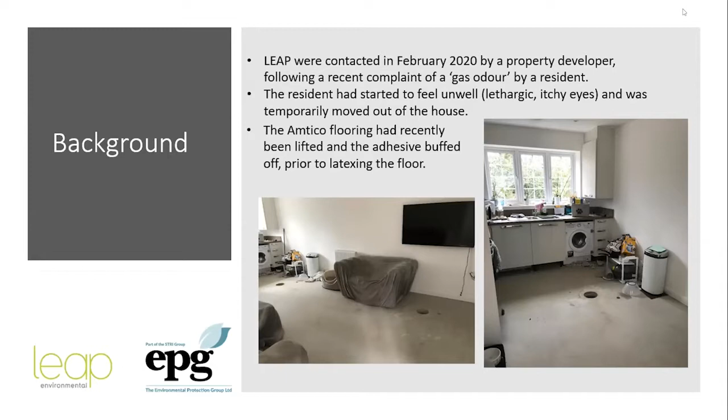So at this stage, nothing obvious to identify why she might be having these symptoms.

Following the background research, we quickly mobilised the site and carried out some ambient monitoring for bulk gases and VOCs in the ground floor rooms, as well as where there were incoming services and penetrations through the slab, so under her kitchen sink, and through the subfloor space via the air bricks. As part of a previous service inspection on the property, when they were trying to rule out a gas leak, there had been a hole drilled in her kitchen floor as well, so we monitored through that too.

The monitoring recorded low concentrations of bulk gases, up to about 0.1% methane and carbon dioxide, so nothing significant there. Generally, VOCs were recorded up to about 0.5 parts per million, with the exception of that hole in the kitchen floor, where we recorded 13 parts per million. So this wasn't necessarily significantly high, but it was the only location of anything to note.

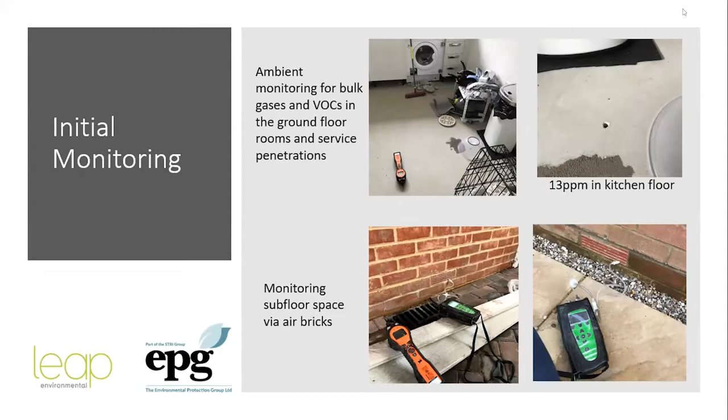So the next stage of the investigation was to go and collect some vapor samples. We did this using SUMA canisters. We also installed a vapor pin in her kitchen floor. This was given that the odour had started once the floor had been lifted, and this is where we'd found 13 ppm. This kind of led us down the route towards looking at her flooring.

And we also collected control samples from an adjacent property, and also ambient air outside the property as well. This was a mix of kind of snapshot, collecting a sample over 5 minutes, as well as slow release canisters over 2 to 24-hour periods, to see if there was any variability of when the vapours were occurring.

Samples were tested for VOCs and TICs, those are tentatively identified compounds, with concentrations generally inconclusive. We did record pentane and isopentane in the air and some subfloor samples, but nothing at that stage to indicate a source of her health problems.

So our next step was to actually core through the ground floor slab and look at the soils underlying the property, to kind of see if it was a potential source, or at least to rule it out at that point.

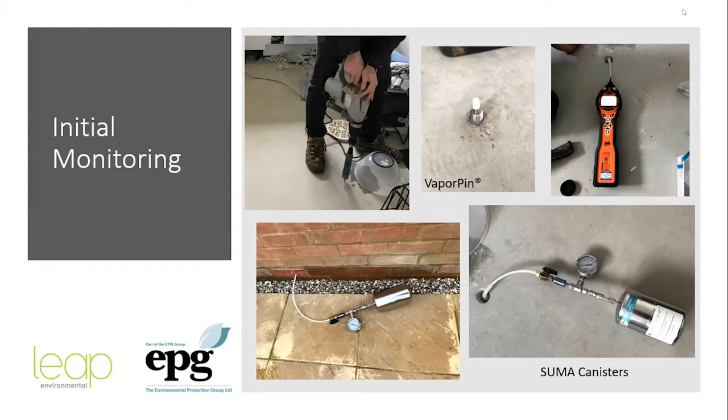So we cored through the ground floor and conducted hand augers beneath the property, with testing completed both on the soils beneath the site and the ground floor slab, and like the makeup of the ground floor. We also did headspace testing with the PID on the soils beneath the house.

So from the core, the floor material was made up of a thin layer of screed, 90 millimeters of concrete, and up to 380 millimeters of polystyrene insulation. So we separated out each of these layers, testing them for the VOCs and TICs.

Whilst the concrete and the screed did not record any measurable concentrations of VOCs, we did record a tentatively identified compound called 2-ethyl hexanol, and that was both in the concrete and the screed layer. Testing on the soils and the headspace testing ruled out the soils as a source with nothing significant recorded there. So we knew it wasn't coming from something underlying the property at that point.

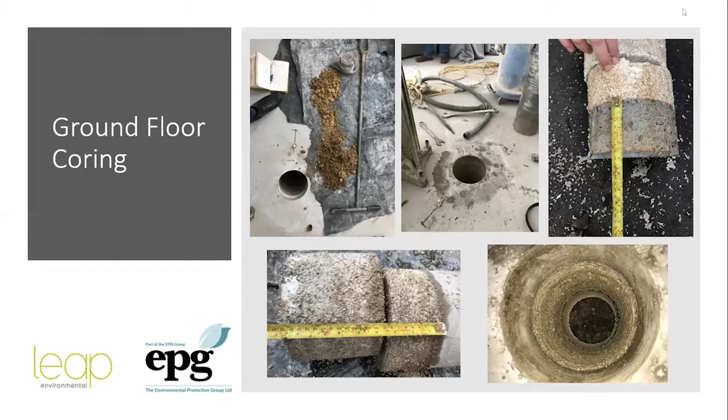And it was at this stage that we got into contact with EPG and with John Andrews, and they carried out research into this project. They undertook research into the construction products used in the house, and looking into any potential VOC release, and reviewed all data that we had collected to date.

So compounds pentane and isopentane and 2-ethyl hexanol had been identified in elevated concentrations within the screed and concrete floor in the kitchen, and isopentane had also been recorded in indoor air samples. EPG carried out research into these compounds. They had quite an extensive amount of information that they went through.

And it looked as though 2-ethyl hexanol, called 2EH for short, looked like the most likely source from their research. So 2-ethyl hexanol could be released from vinyl flooring under certain very specific conditions.

So alkaline hydrolysis of adhesives which contained phthalate plasticizers by alkali oxides, which can be found within concrete. This indicated possibly that the flooring had been placed when the concrete was not sufficiently dry, which created conditions that could release 2-ethyl hexanol.

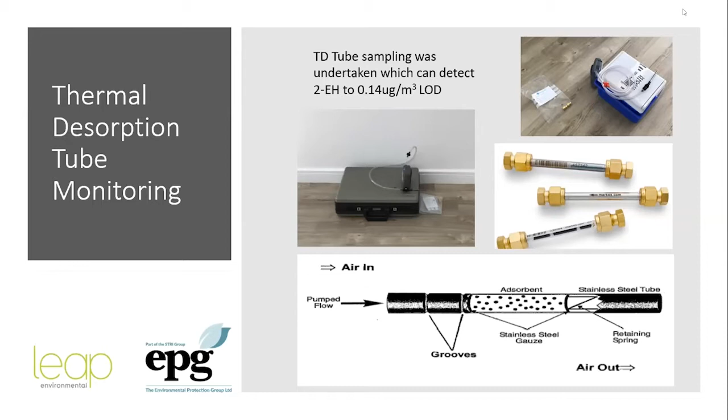Following this, it looked very likely that this was the cause of the health complaint, and EPG came up with some remedial works that should be undertaken on the property. This involved removing all of the original PVC flooring and the screed that had been placed on this concrete, and making sure all service entries were sealed with a suitable sealant.

The concrete was then heated to reduce the relative humidity to less than 75%. This was to prevent further reaction occurring, because it was likely that the damp concrete in the first place was the reason for the reaction to occur. The floor was then sealed with an epoxy resin, a low alkaline screed was placed, and the Amtico flooring was reinstated with a dry bonded adhesive.

These measures were used to prevent any further reactions occurring, and actually to stop more 2-ethylhexanol being generated. In addition, the Amtico flooring would also act as a seal, removing the pathway of the 2-ethylhexanol that could still be within the concrete. The property was then ventilated, and LEAP returned to do some verification monitoring.

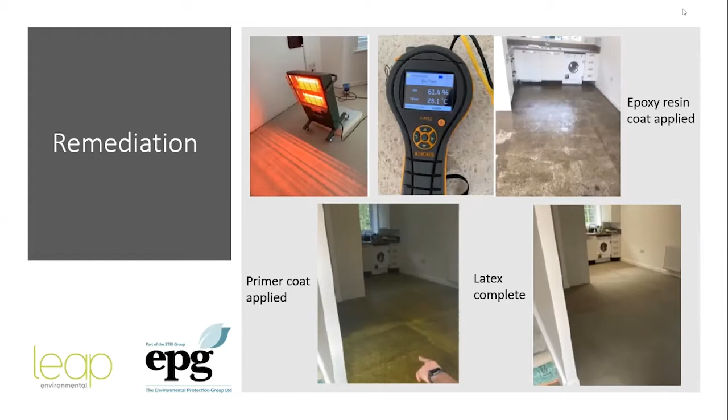The monitoring was undertaken. Initially, we still recorded elevated concentrations of 2-ethylhexanol. These were thought to still be residual vapors from the recent remedial works. The property obviously wasn't being lived in at this stage, so natural ventilation, people opening doors and windows regularly, wasn't occurring.

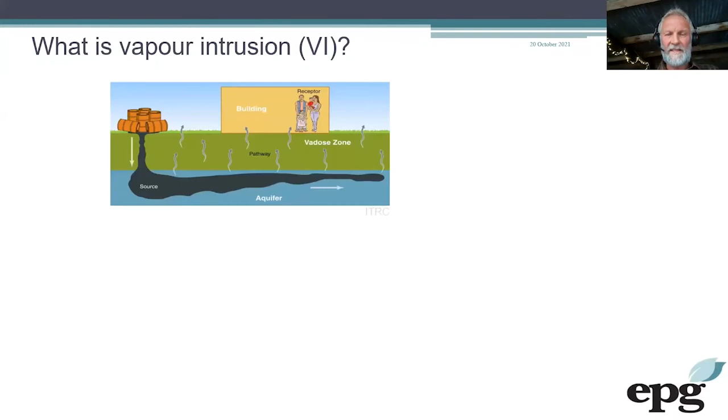And so what is vapor intrusion? Actually, I'm just going to remove my thumbnail. There you go. So what is vapor intrusion? In its basic form, looking at this conceptual model, it's the movement of VOCs from the subsurface into indoor environments where people living there are exposed through inhalation exposure.

And it's a typical source-pathway-receptor type of relationship, and it's relevant both to planning or future risk, or to the Part 2A or current risk scenarios.

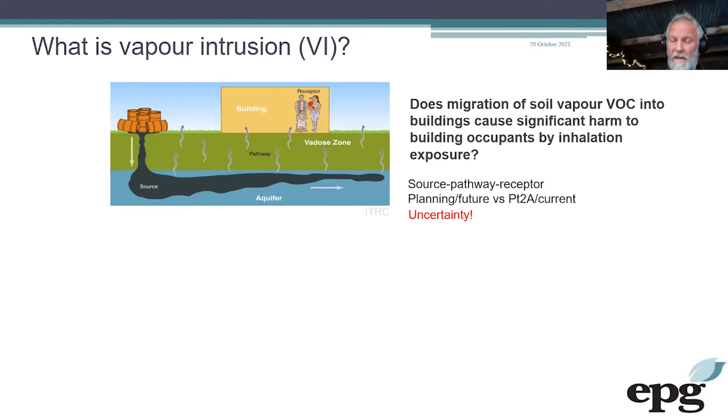Under Part 2A, there might be a potential impact on indoor air quality, where you're looking at all of the source-pathway-receptor, including possibly looking into the building, whereas under planning you might be considering a future building, with additional uncertainties as to how anything you build later, such as a building on land, might affect your understanding of the vapor intrusion conceptual model. So through all parts of that, there are potentially large amounts of uncertainty.

The VOCs we're talking about are always a combination of being volatile and toxic. We're familiar with petroleum hydrocarbons such as BTEX compounds and chlorinated hydrocarbons such as trichloroethylene and vinyl chloride.

In terms of SVOCs, naphthalene, the most volatile of the PAHs, definitely has the potential to pose vapor intrusion risks under the correct scenario, whereas lower volatility but more highly toxic PAHs such as benzopyrene don't pose vapor intrusion risks, but they can pose additional risks, typically through dust inhalation exposure.

Methane is a highly volatile hydrocarbon. It's gaseous in its normal state, relatively low toxicity, but as we know, can cause acute risk at high concentration. Really, methane is no different from any of those other compounds - it's just an organic compound with a toxicity, a volatility, and various types of source.

They're not so different to radon either, although it's not an organic compound. Radon is a gas, it's toxic, it gets into buildings, and it's not so different to petroleum hydrocarbons. Radon has a half-life, which reduces its concentration as it migrates through the subsurface and into buildings. Petroleum hydrocarbons are the same - they biodegrade in the subsurface as they migrate into buildings. Yet as practitioners, we tend to separate all these things out, whereas they're all the same. They're just compounds that migrate under fluid flow situations into buildings, and it's a bit of an artificial divide we have between these things.

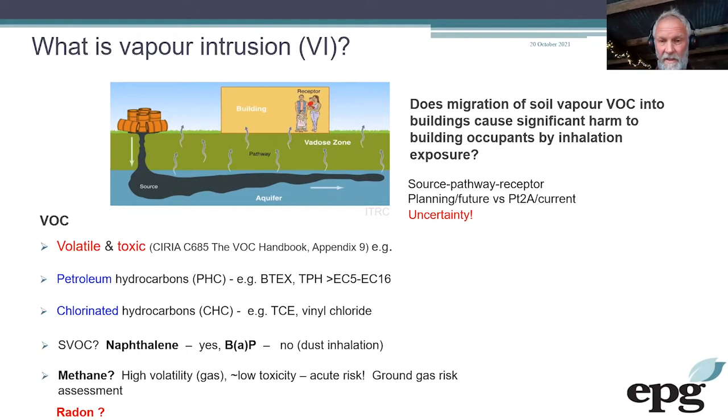There are significant health, social, financial, and reputational implications of making incorrect decisions with regards to vapor intrusion risk assessment. Many VI decisions are based on either false positive or false negative interpretations of data, resulting in either unnecessary indoor air quality testing or remediation. This is, as we'll see, particularly common for petroleum hydrocarbons.

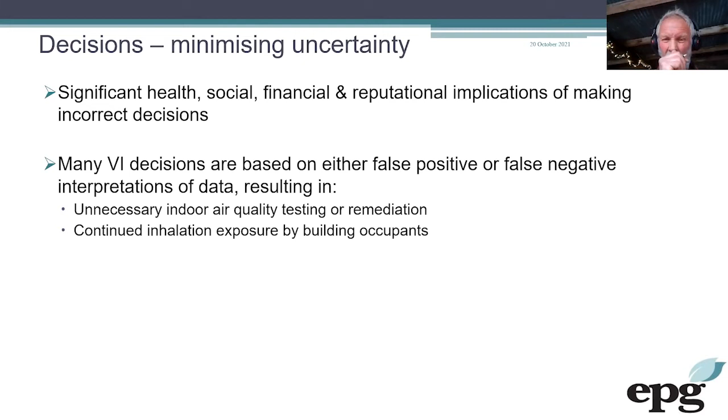Or your investigation may indicate a false negative conclusion, with building occupants thereby having continued inhalation exposure to these chemicals, and that's fairly common with chlorinated compounds - we'll see why there's a difference there between the two. But clearly, minimizing uncertainty is good for decision making, and it needs to be concentrated where it has the biggest effect for the less money and the less intrusion to people. Really key to minimizing uncertainty is development of a robust vapor intrusion conceptual site model.

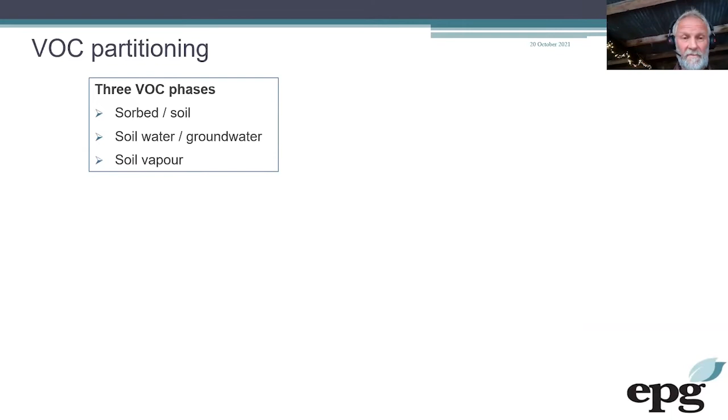Back to basics: VOC partitioning, and this is key to some of the uncertainty. There are three typical VOC phases: sorbed, soil pore water, or in the soil vapor or gas phase within the pore space. Under certain conditions, when these situations are saturated or exceed saturation in any of those phases, it gives rise to a non-aqueous phase, either light NAPL, such as petroleum hydrocarbons, or dense NAPL, such as chlorinated hydrocarbons.

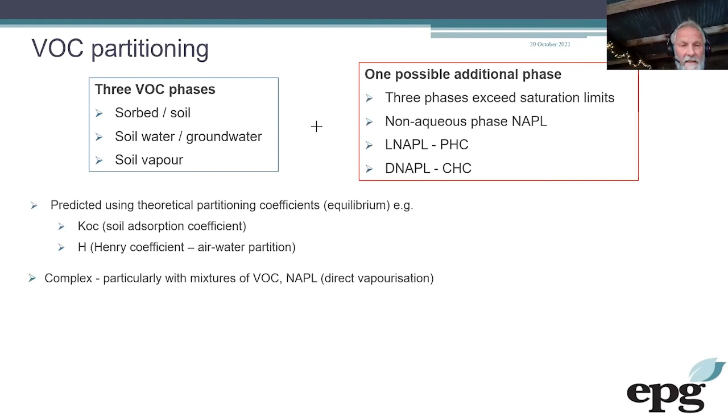The different partitioning between these phases is predicted using theoretical partition coefficients, which by definition are based on equilibrium situations, such as KOC, the soil adsorption coefficient, or the Henry's coefficient, which is the air-water partition. The thing to understand is that VOC partitioning is a highly complex mobile situation, particularly where you have mixtures of different compounds.

You might have NAPL, whereby you get direct vaporization from the NAPL into the unsaturated zone. So it's quite a complex situation. The important thing for us to remember is that when you predict a soil vapor concentration based on soil or groundwater, generally what you predict is far less than what you measure.

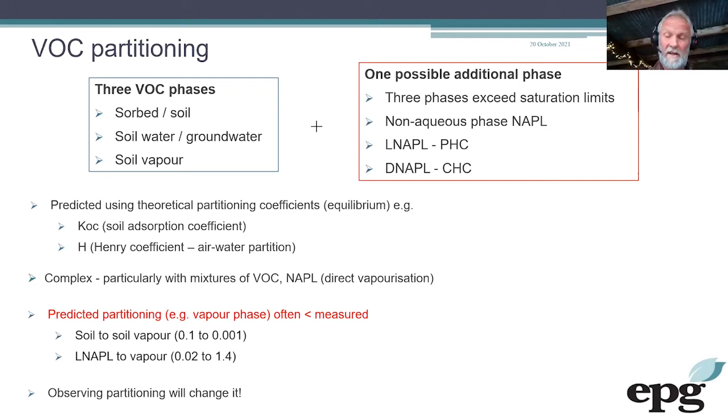So soil to soil vapor, that would be 0.1 to 0.001 times under or overestimation. With LNAPL, you might either underestimate it by 50 times or overestimate it by 1.4 times. Key to this, and this is also really evident when we look at methane within boreholes, is that the actual process of observing partitioning will often change it. We drill boreholes into the ground, we introduce oxygen, etc., and then we measure, and we need to understand how we can actually affect that process.

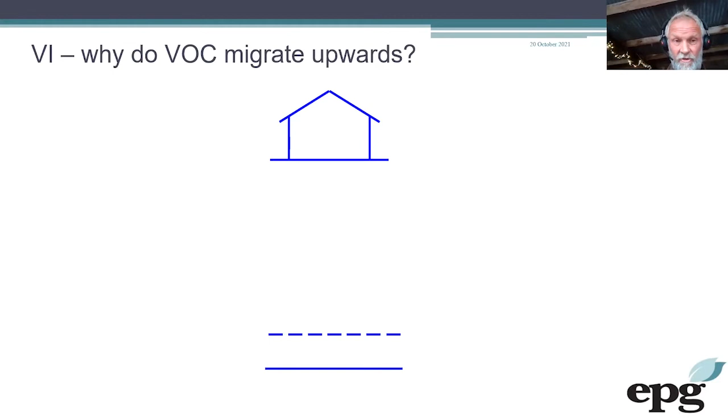So why do VOCs migrate upwards from the soil up into buildings, which is what we're interested in with regards to vapor intrusion? Really, it's got to do with gradients and flux.

Just as your cold beer warms up on a hot day and water flows downhill, things move in the subsurface down gradients. It's important to understand the idea of flux, which is concentration flow over time, rather than just looking at individual concentrations.

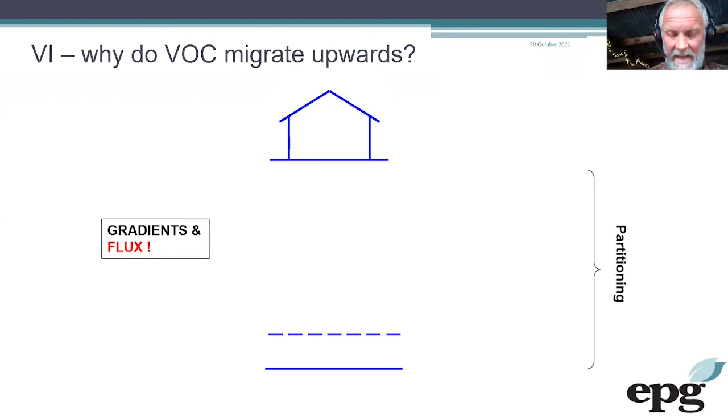In vapour intrusion risk assessment, it's the flux that really makes a difference, just as with ground gas, unless you're dealing with a landfill, the flux under diffusive flow is really slow, and the movement is down a concentration gradient. You can have diffusion from groundwater through the semi-unsaturated zone into the unsaturated zone, and as we'll see shortly, this is actually a really slow process, diffusion from water into the air phase.

Once it's in the unsaturated zone, it can migrate in any direction down a concentration gradient. It's only really when you get to about a meter or so beneath the building that you start to get increased flux under advective flow. And advective flow is flow down a pressure gradient. In order to have a flow through a building, you need to have a slab with holes in it.

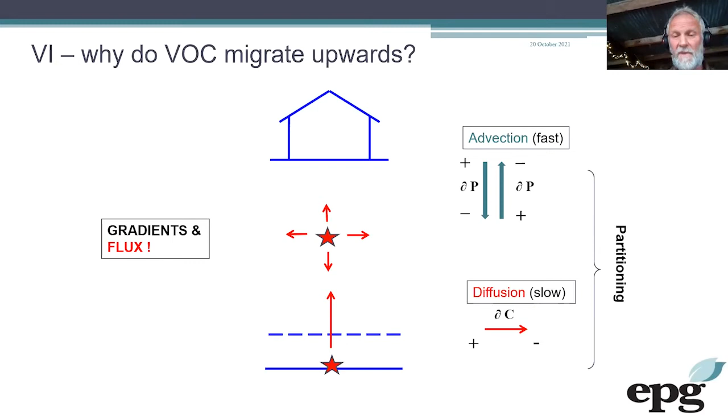Without holes, if you had a membrane that was fully sealed, you might have a pressure gradient between the two, but you would have no advective flow. You still have diffusion through a membrane, although it's a much slower process than through advection. The sort of pressures we're looking at are 5 pascals difference. So if you have a lower indoor pressure relative to the subsurface of 5 or so pascals, that's sufficient to drive the advection of soil vapor into the property.

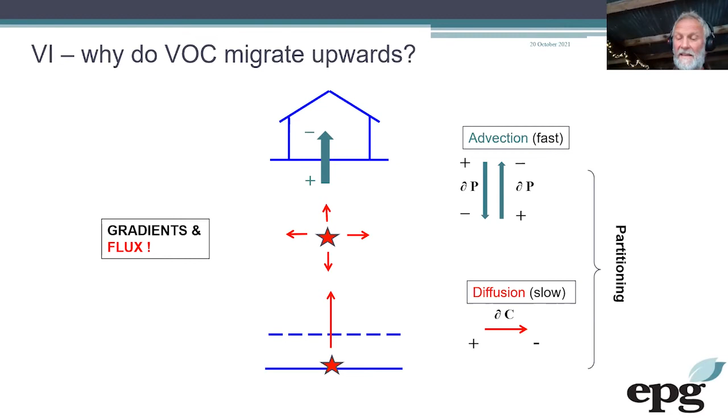Negative indoor air pressures are caused by a number of processes, one of which is the stack effect, which is a delta temperature, delta pressure effect, where warm air moves out of openings such as chimneys. It can also be caused by wind, so higher pressure on the windward versus the leeward side causes a change in pressure within the building.

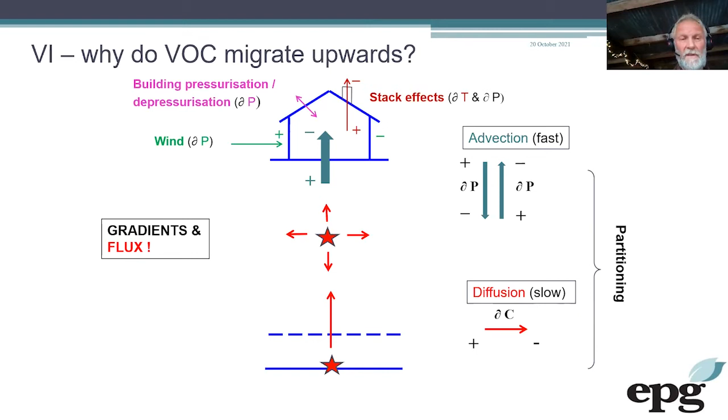It can also be caused by building depressurization, particularly in modern buildings where you have mechanical ventilation. If that's set wrongly and you get a net negative pressure relative to the subsurface, then you can draw contaminants from the subsurface into your property.

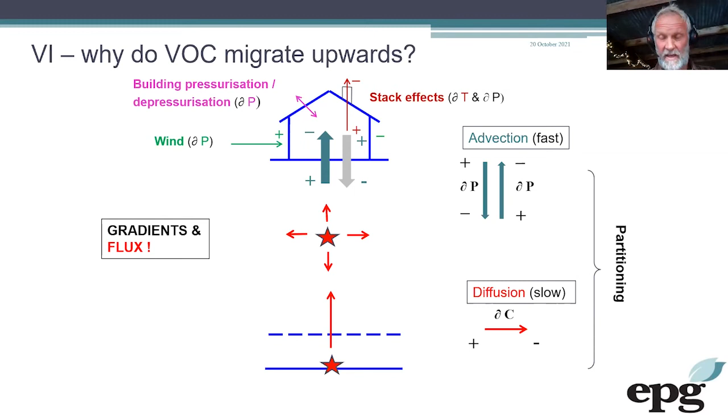Conversely, if you pressurize your building, you effectively turn off vapor intrusion, pushing air from the building into the subsurface. This can complicate investigation, because if you have an indoor source of VOC, you can actually push those into the subsurface where you can measure them, and you might come up with potentially incorrect conclusions about vapor intrusion.

Conventional CSM, and I'll go through this really quickly. We tend to look at VOCs either in groundwater or in soil, and we may measure or predict concentrations in the soil vapor phase. These diffuse and then advect through the floor where they dilute in indoor air.

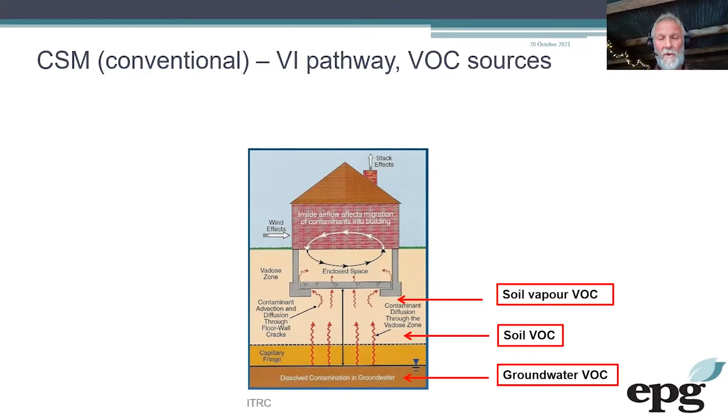This dilution through building ventilation is a key mitigating factor. The flux of contaminants out of the building due to ventilation is generally much higher than the flux through the floor. Where you have preferential openings in the floor, the balance of that flux gets affected, and you can significantly affect indoor air quality.

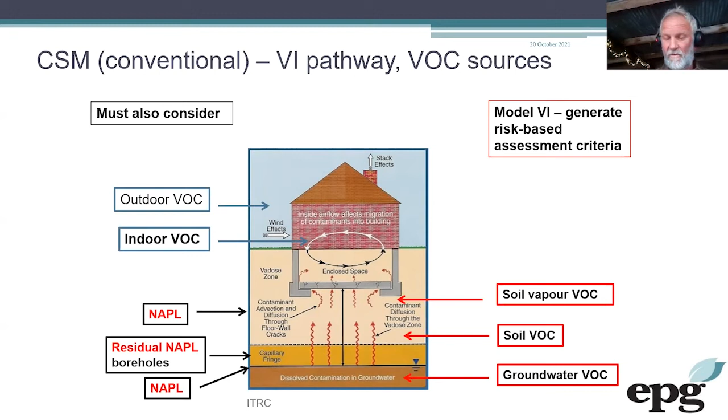We also have the additional complications of considering outdoor sources of VOC, and in particular indoor sources of VOC. A lot of the things we look for in the subsurface are also quite ubiquitous in indoor air.

Now, this is undertaken unless there's a potential acute or short-term risk, and this is actually really important. So if you have a site, such as one I'm working on at the moment, with a chlorinated solvent potential risk to residential properties, and if you think that there is a potential acute or short-term risk, then you should be open to the idea of actually looking into those properties either initially or very quickly as part of your multiple lines of evidence approach.

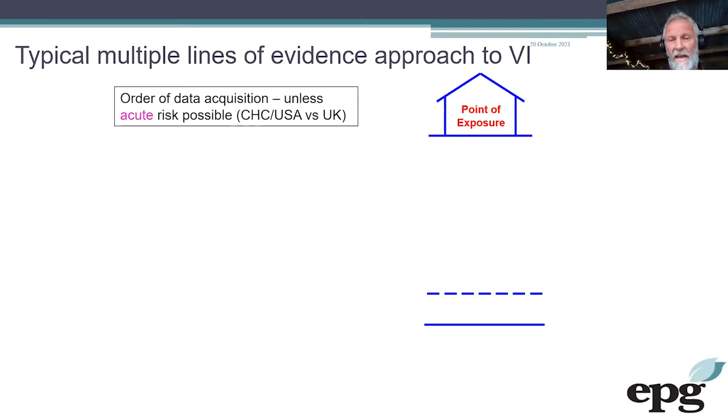This is something that is particularly undertaken in the US, where they have far more litigation. If you have a chlorinated solvent site, it's very difficult to show that there isn't a risk without actually going into that property and proving that's the case.

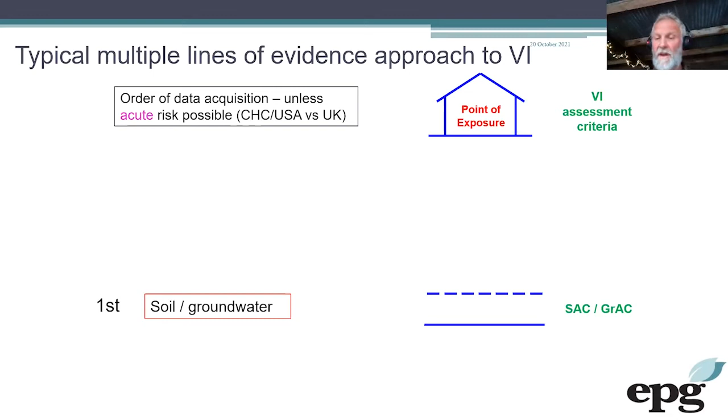So it's to rule out the likelihood of false negative assessment. We typically look in soil and groundwater, and we compare that with soil assessment criteria or groundwater assessment criteria that we may calculate or that's published.

Then in order to reduce conservatism, if those results are saying you've got a potential vapor intrusion risk, and we know there is a high level of over-prediction when you predict what might be in the soil vapor phase, you actually go and measure the soil vapor phase to take out that uncertainty, measuring what's further along the vapor intrusion route.

You may compare those with vapor GAC that you may calculate, or if you wait for SoBRA to calculate them for you. Thirdly, you might look at subslabs. You're getting closer to the point of exposure, and you want to know what's directly beneath the house, either by taking near slab samples just outside the house, or you may decide to drill through the floor and look in the subsurface.

When you take all of these things into account, you may actually go, okay, the evidence points to a potential significant risk, and then you actually go into the indoor environment and measure air quality and compare that with health criteria values.

You need to be really careful about your data quality objectives. You need to make sure that the laboratory detection limits, particularly for highly toxic compounds, are sufficiently low enough for you to be able to compare directly with health criteria values.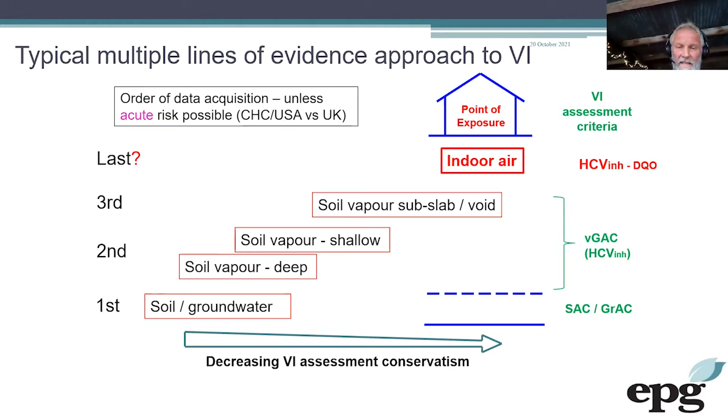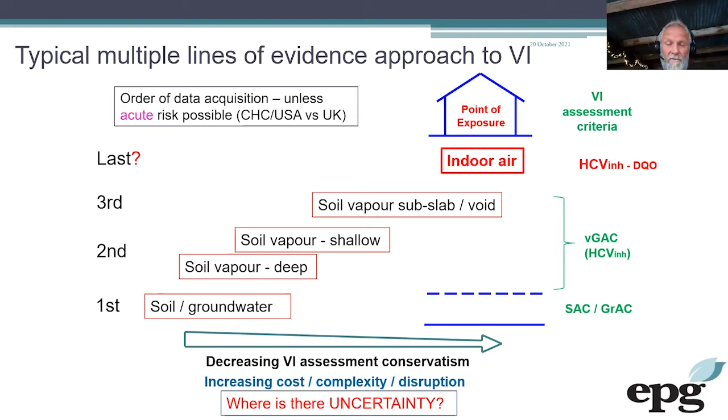So throughout this process, we're decreasing vapor intrusion assessment conservatism, but this obviously comes with increasing cost, complexity, and indeed disruption. So where is there uncertainty in all of those, as we'll see in a little bit.

We've looked at a conventional vapor intrusion pathway: diffusion through the deeper soil from groundwater or from soil, then advection and diffusion through the floor slab, dilution in indoor air, and then inhalation exposure. That's what models, the Johnson-Ettinger model, would be based on - that type of scenario.

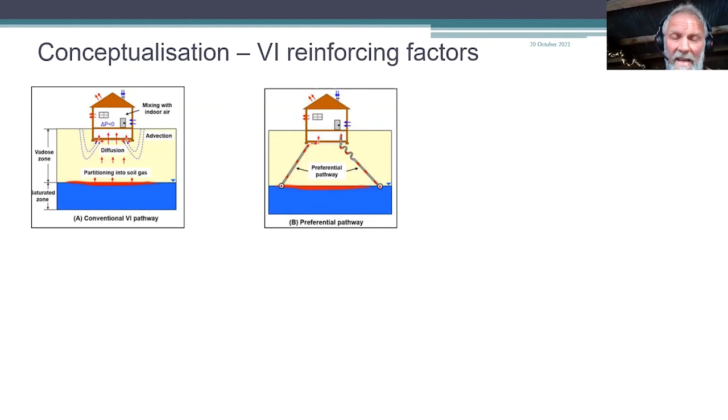But what models don't include are unconventional pathways, so preferential pathways. These may be deep sewers, so migrating through the sewer pipe or through the sewer annulus, or through any unsealed service entry going through the floor slab, increasing the advective flow.

Fractured bedrock is also, whilst it may not provide an entry into the building, it can provide preferential flow from deeper sources right to the underside of a building.

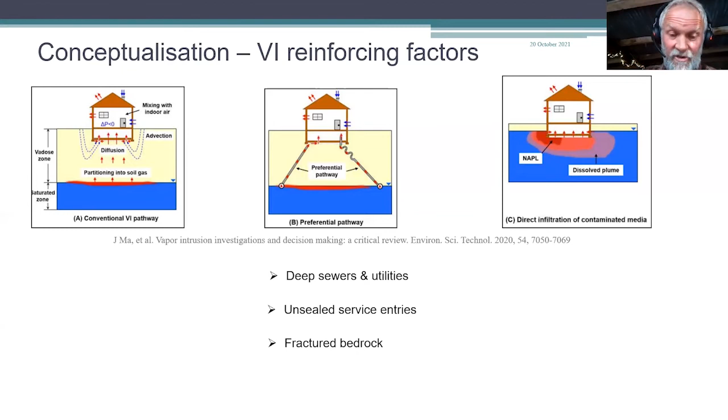Really importantly, direct contact of in particular LNAPL with building fabric - so you can have really significant vapor intrusion risks. It's slightly different to vapor intrusion; it's saturation of building fabric and entry into a building through classical vapor intrusion methods or processes, but you can end up with heating oil causing huge indoor air quality issues.

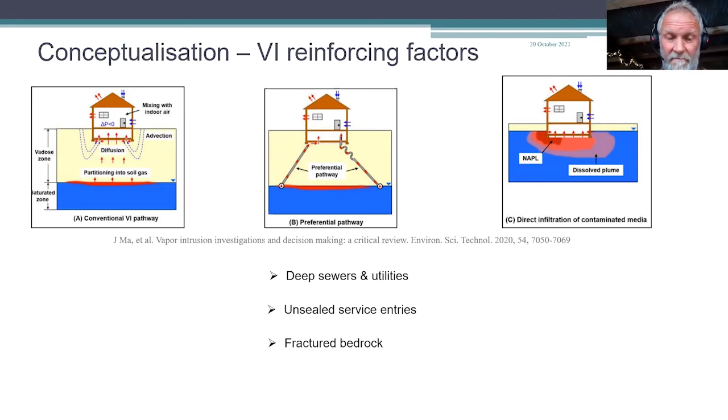I've been involved with a few cases where buildings are considered for demolition, and people having their health tested and being taken out of their houses.

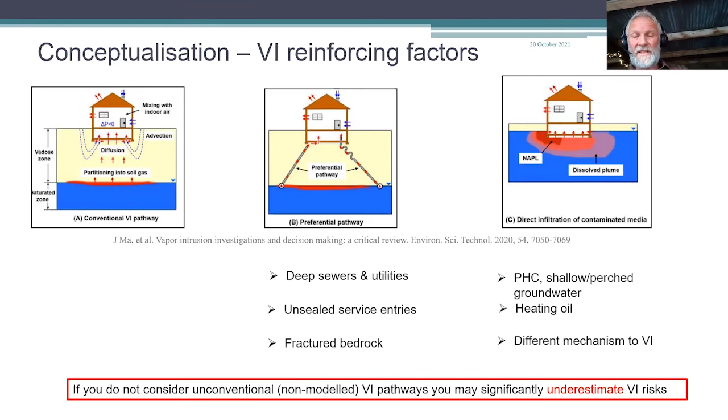So if you do not consider unconventional vapor intrusion pathways, then you can significantly underestimate vapor intrusion risk.

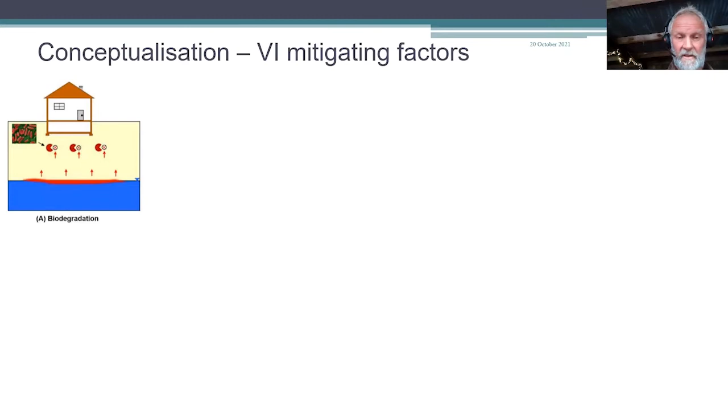But it's not all bad news, so there are a number of mitigating factors. First of all, biodegradation. If you have petroleum hydrocarbons, these can biodegrade very rapidly in the subsurface, and this process is responsible for reducing the vapor intrusion risk from petroleum hydrocarbons to quite low levels, except under certain circumstances, which we'll look into a little further.

Biodegradation is also the primary reason for different approaches to petroleum hydrocarbons and chlorinated solvents. In the US in particular, there's a real divergence in approach to looking at petroleum hydrocarbons and chlorinated hydrocarbons. In this country it's less understood - I think we're a bit behind on our VOC guidance, the last one being produced in 2009.

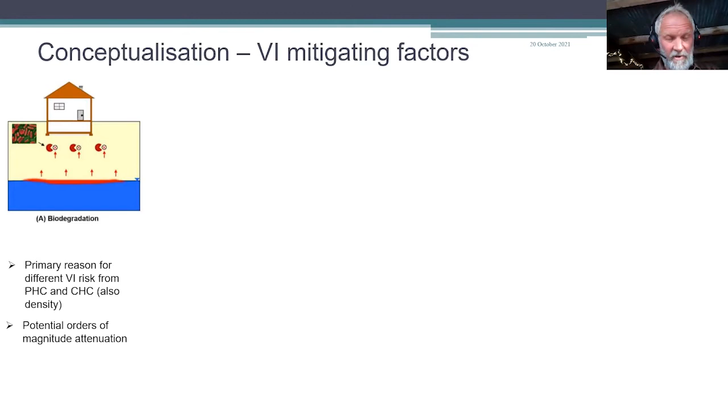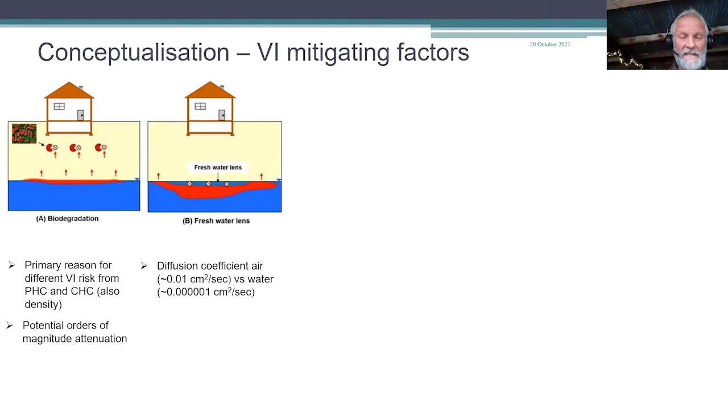You can also have freshwater lenses, or if you have, say, chlorinated solvent at depth migrating under a property with freshwater above, the rate of diffusive flux through water is really slow. Diffusion through air is 0.01 centimeters squared per second, versus through water, with lots of zeros, 1 centimeter squared per second - far slower. So diffusion from a dissolved phase source into air is actually really slow.

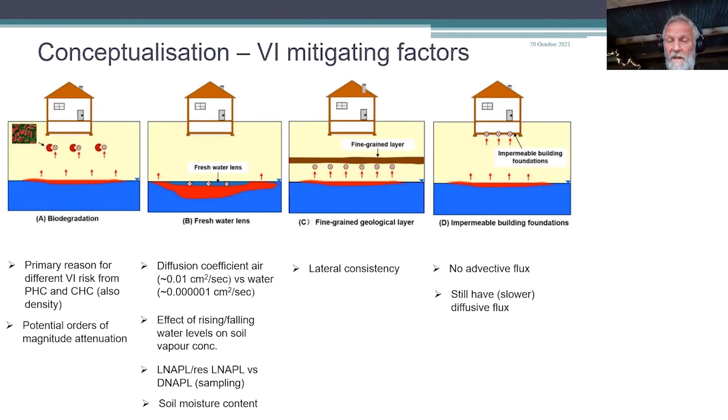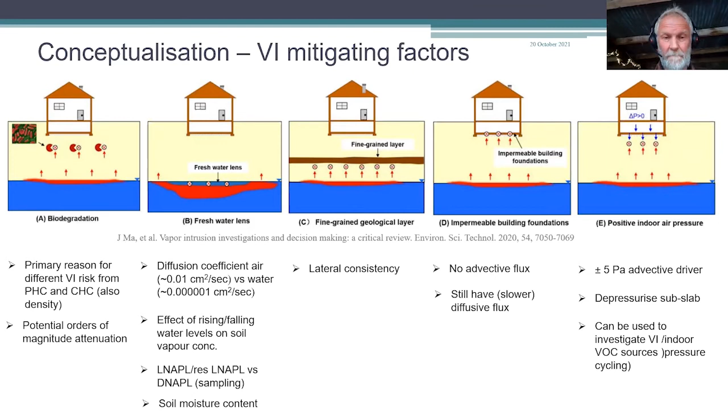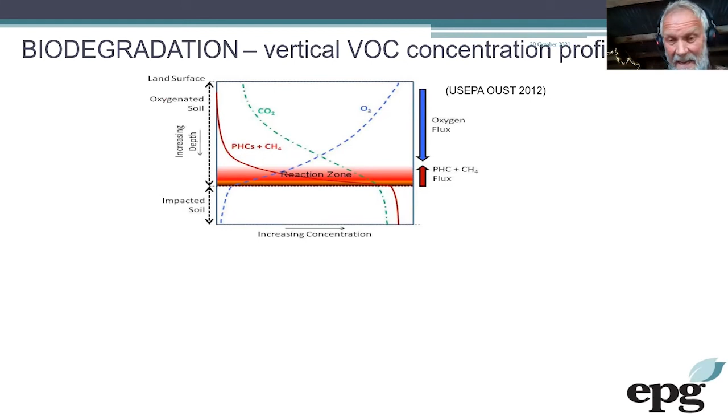The process here is flux of petroleum hydrocarbons moving up to the surface, and a key factor is the flux of ambient oxygen from the atmosphere through the soil down into the ground. If you look at the red line, the concentration of petroleum hydrocarbons with depth, they're high at depth and reducing through the reaction zone down to potentially zero at the axis intersection. The important thing to note is the concentration of oxygen is the opposite - high in shallow soil, low in deeper soils. That's occurring because of biodegradation. It's important to measure oxygen concentrations and hydrocarbon concentrations to understand what's going on here.

The rates of biodegradation are significant for petroleum hydrocarbons where sufficient oxygen is present. If you have free phase and the rate of diffusive flux of hydrocarbons into the subsurface exceeds the flux of oxygen, you end up with anaerobic conditions, and your rate of biodegradation can be quite low, therefore you end up with a higher vapor intrusion risk.

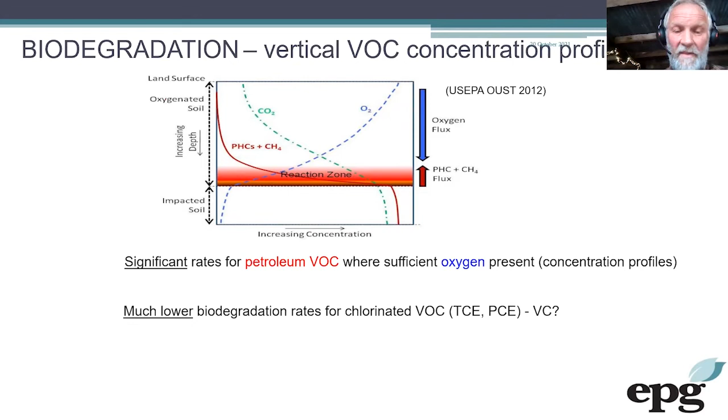These rates are much lower for chlorinated hydrocarbons, and this is the key reason, as well as the toxicity and dense nature of chlorinated hydrocarbons in water. The lack of biodegradation is the key reason why there's a much different risk profile for these two types of compounds. Chlorinated hydrocarbons can really cause vapor intrusion risk, and there are many examples where indoor air quality has been significantly affected. Even for low concentrations, 10 micrograms per liter of TCE in groundwater can pose a significant vapor intrusion risk and impact on residents.

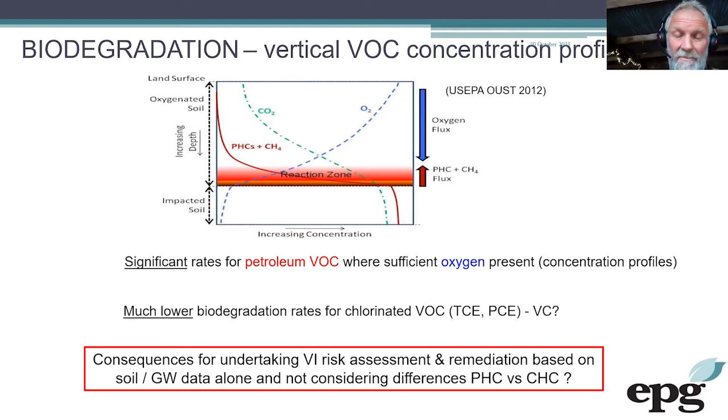So the real consequences of undertaking vapor intrusion risk assessment and remediation based on soil and groundwater data alone - if you're not measuring the actual soil vapor concentrations, you could be vastly overestimating risk, particularly for petroleum hydrocarbons, and you really need to consider the differences between petroleum and chlorinated solvents.

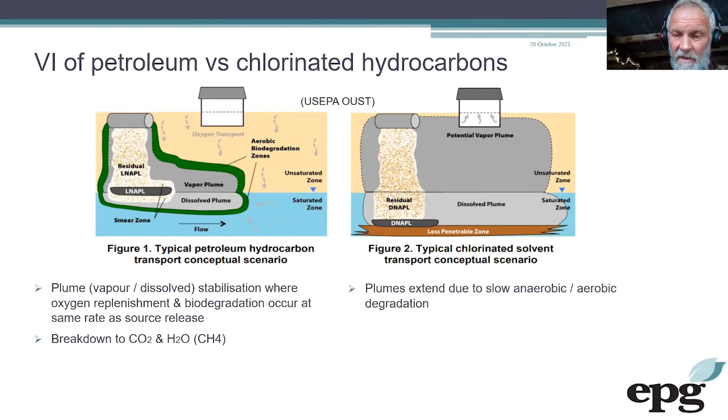I'm going to go through that - so really then, temporal variability in indoor air. I mentioned that all of our process of undertaking risk assessment is either predicting what's in indoor air, or under certain circumstances, we actually go and measure what's in indoor air. And there's huge amounts of temporal variability in indoor air quality.

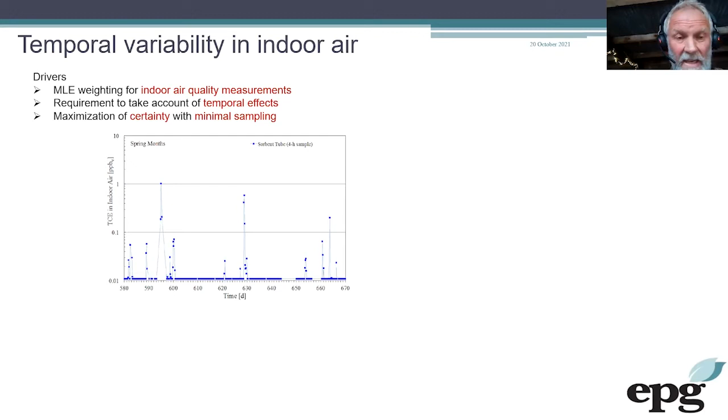Just by way of example, this is real data, subsurface source of TCE measured in indoor air, and each of those blue dots is a sorbent tube sample, sampled consecutively over a 90-day period. If you take that as the real data, and you're sampling over that period, you might take a Summa canister or sorbent tube at one point, or three consecutive samples over three consecutive weeks. How does that compare? Or a 30-day time-weighted average sample compared to that - you get vastly different results.

Or if instead of sampling in spring months you sample in winter, that's hugely different data. Vapor intrusion is generally far more significant in winter months, often due to decreases in indoor air pressure relative to the subsurface caused by stack effect, and less ventilation because people don't open windows. But this is real data - if you sample in spring at any of those four points and made a conclusion about people's exposure, not accounting for potential winter exposure, you may be vastly underestimating risk.

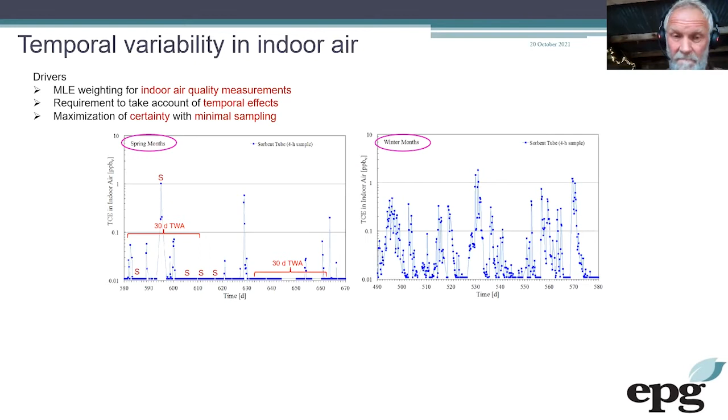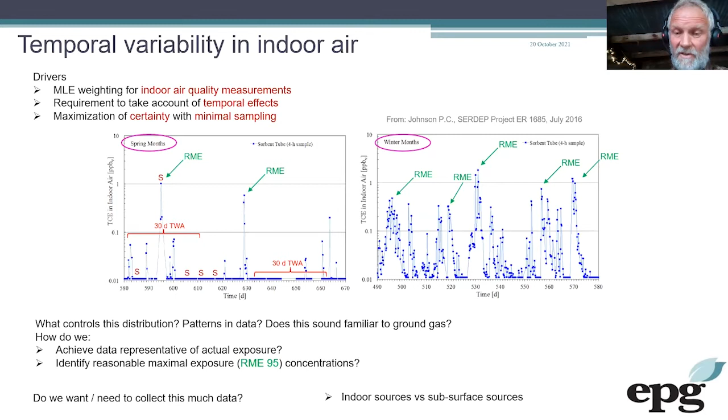Okay, I'll whip through that - that's kind of an Americanism about measuring reasonable maximum exposure, and how you can use other scientific processes to identify when those RME events occur, but that's a different talk. We also, importantly, have to try and differentiate between indoor versus subsurface sources, and there are interesting ways you can potentially do that, although we don't have time to discuss that.

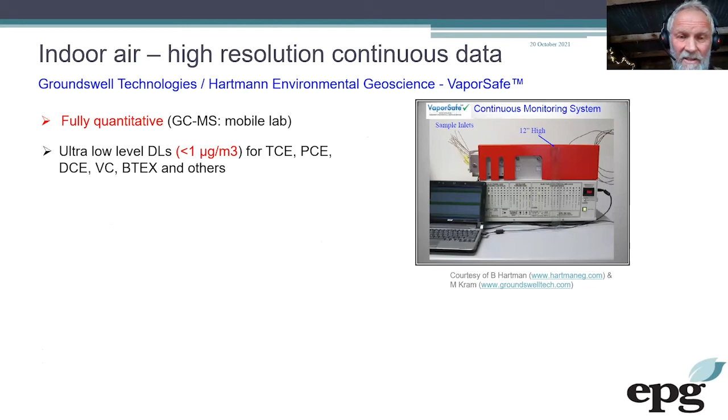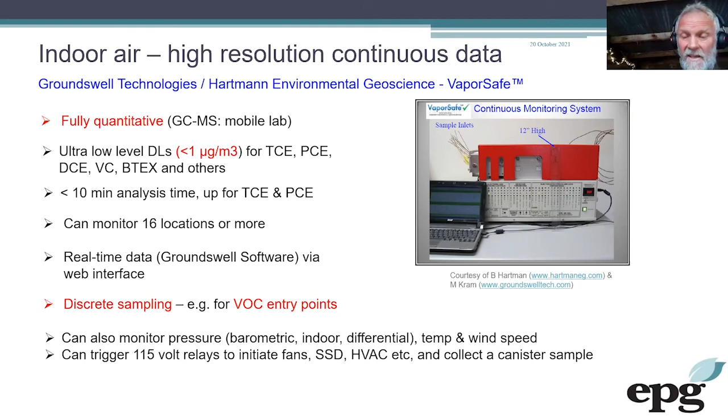So there's one way of really minimizing uncertainty looking at indoor air quality itself, and that's by taking high resolution continuous data. This is a US device, effectively a portable lab - a mobile GCMS with ultra low detection levels for chlorinated and non-chlorinated hydrocarbons. It produces results really quickly, you can look at data in real time, discretely sample potential vapor intrusion points, measure barometric pressure, indoor differential pressure, wind speed, etc. So you get a lot of data which you can make useful correlations with. But what's really important is it's also expensive.

It's the patterns in the data. Just as we look at ground gas risk assessment and understand what causes highs and lows in methane concentrations below the ground and in houses, it's the kind of correlation with other events that's key.

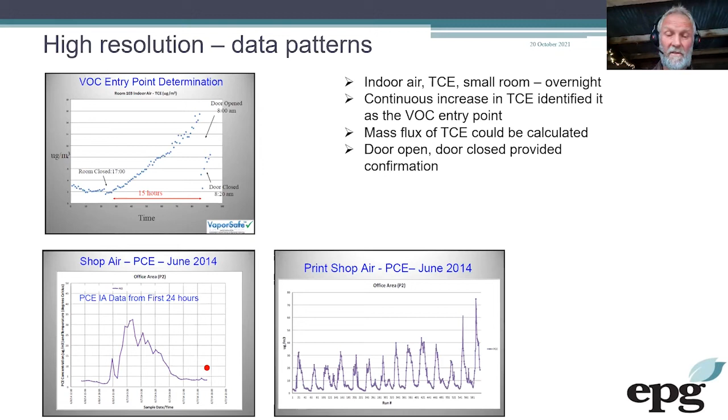This led them to realize it's actually the HVAC system. The ventilation system, during the day, had a higher indoor pressure, which was effectively turning off vapor intrusion and lowering TCE concentrations in indoor air. Then during the night, because no one was there, the HVAC was automatically stepped down, the differential pressure decreased, and effectively turned on vapor intrusion, and concentrations went up overnight.

Again, looking at this pattern, if you took a 14-day time-weighted average, you would conclude the exposure is significant and there's a significant issue. Whereas if you actually look at concentrations during the day, where there actually is exposure, they are acceptable. Understanding the pattern would actually lead you to keeping your HVAC system on overnight at a suitable level to effectively turn off vapor intrusion.

So the key here really is that there's huge amounts of uncertainty in indoor air quality, but there are methods whereby you can really understand that. But it's an in-depth process which requires a fairly high degree of knowledge and financial input.

Right, so that's the end of the talk. But I just wanted to finish on a final thought about risk, something I dwell on a lot. As a lot of us, we are contaminated land risk assessors.

We're dealing with looking at acceptable risk between 1 in 10,000 to maybe 1 in a million if you live in the States. This is an excess risk of dying over a lifetime, and this could be for an individual. The thing I stew over quite a bit is how do we really try and square that with the risks we all face from the climate crisis, which could be existential risk within our lifetime, or even if not existential, the risk of billions of people dying. As risk assessors, how do we square that? It's actually quite difficult.

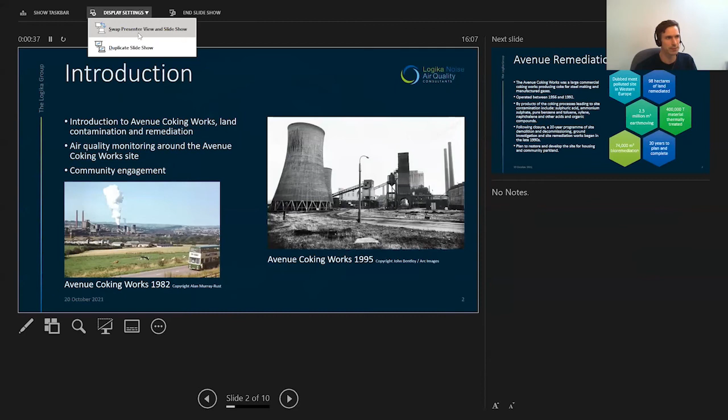So I'm going to structure this talk with a quick introduction into the Avenue Coking Works, its land contamination and the remediation project, and then talk more specifically about my area of expertise, which is the air quality monitoring program that was involved during that remediation work, and talk a little bit as well about community engagement.

I think this was touched upon by Melanie in her topic, talking about having to engage with a concerned resident in her case with respect to a mystery odor and some health effects. In this case, as is the case for air quality in general, it's not something that people can perceive, but it's certainly a health risk and something that people are concerned about. So wherever you have known emissions to air, it's always helpful to be involved in that community, so that they can understand it and ideally not fear it where there's no need to.

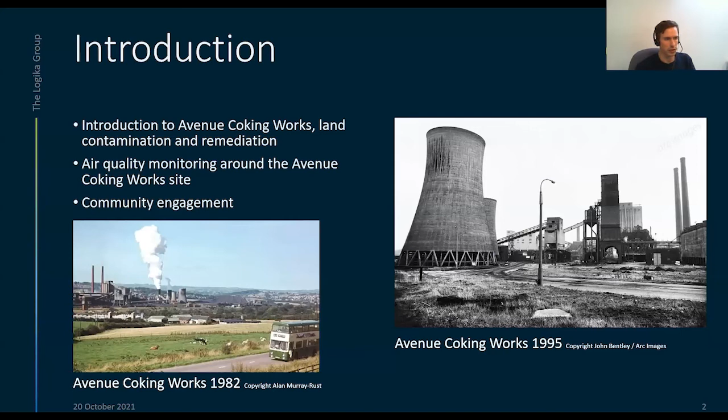So I'll start with the coking works themselves. There's a couple of old pictures here, and more throughout the presentation, but it was an old coking works where they produced coke for the steel making industry primarily. The site's located in Chesterfield in Derbyshire, and it was operated between 1956 and 1992, and following its decommissioning...

During the coking process itself, there's a whole series of byproducts produced that led to land contamination, such as sulfuric acid, ammonium sulfate, benzene, toluene, xylene, other acids and organic compounds. In the main, the strategy for the byproducts was just to store them on the site. There were some very large scale open lagoons that material was left in, and the site as a whole, upwards of 100 hectares in total area, was left very contaminated.

Following its closure in 1992 and some initial investigations, it was dubbed the most polluted site in Western Europe. I can't vouch for the accuracy of that, but that's certainly something that was bandied around. The total area of land that required remediation was around 98 hectares.

Following closure, there was a sort of 20-year program that started with demolition and decommissioning of the coking works itself, and a huge program of ground investigation, which led into site remediation works, beginning in the late 90s and running right through to completion only a couple of years ago.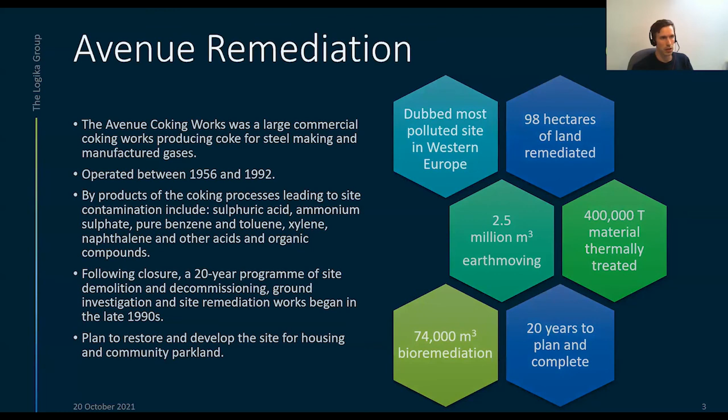The whole scheme was run by Coal Board, as part of a Coal Board project with Homes England, with the plan to restore the site and develop it for housing and community parkland.

Here's a couple of photos from the site during remediation works. A picture of the thermal treatment plant, which was there for many years working hard cleaning up a lot of the material. The process, following all the site investigation, was that essentially the whole site was excavated to some quite significant depth, and all of that material was treated in some way or was stockpiled depending on how contaminated it was, with a large volume treated with thermal desorption.

The photo on the right is an excavated tar lagoon, one of the big lagoons where a lot of byproducts from the coking process had been stored, and was an incredibly contaminated part of the site. There was at least 2 or 3 of those on the site itself.

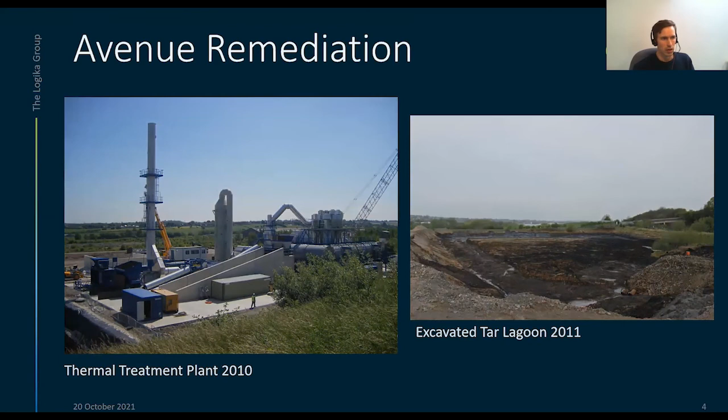In terms of the process as a whole, I'll come back to it, but here's a pile of material excavated from the tar lagoon being stored prior to treatment, with a misting spray on it. There was a lot of mitigation put in place during the process to try and minimize emissions to air. The key concern was that through significant rapid disturbance of all of this material with the contaminants in it, the pollutants would become airborne and may affect the local community.

The photo on the right here is a finished part of this new parkland area, which isn't too far from the big dirty lagoon in the photo I showed on the previous slide.

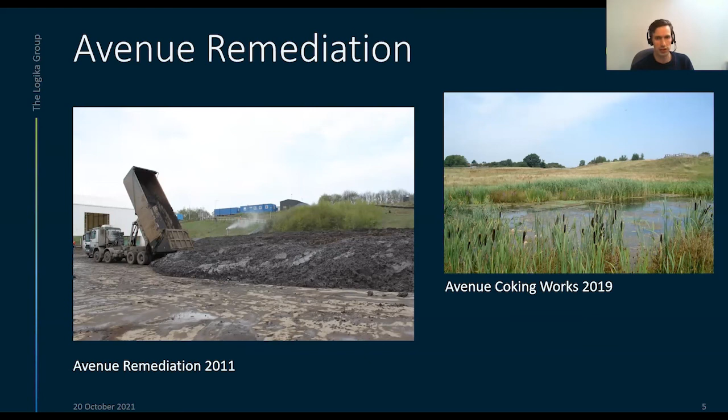So here's just a quick brief of what the plan was to end up with. There's a large area of community parkland, and then the rest of the site will be developed out into housing as a mixture of dwelling houses and apartments, and this is all within the under construction phase. It may be the case that some of the early dwellings are now occupied on the site.

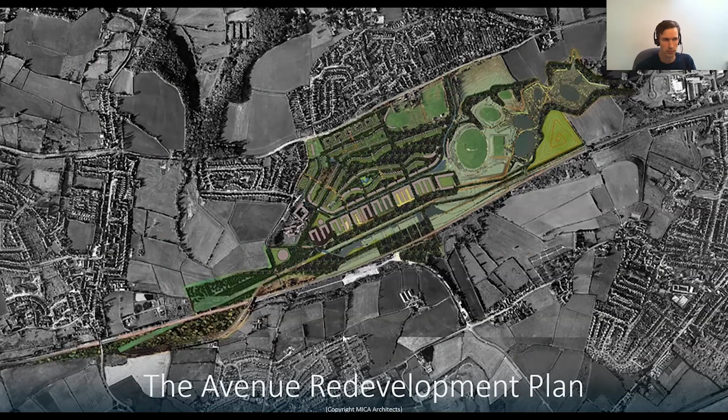So the air quality monitoring regime that went on during this process was started a few years after the work was conceptualized and the site investigation had begun. This was in the early 2000s.

Initially, there were 9 permanent air quality monitoring stations set up on locations around the boundary of the coking works, and on locations off-site as well.

All of these sites were set up to measure various pollutants - particulate matter such as PM10 and PM2.5, deposited dust, which was then often analysed for species such as silica, carbon content, heavy metals. There was nitrogen dioxide monitoring, PAHs, phenols such as benzene, toluene, xylene, and cyanide, among others.

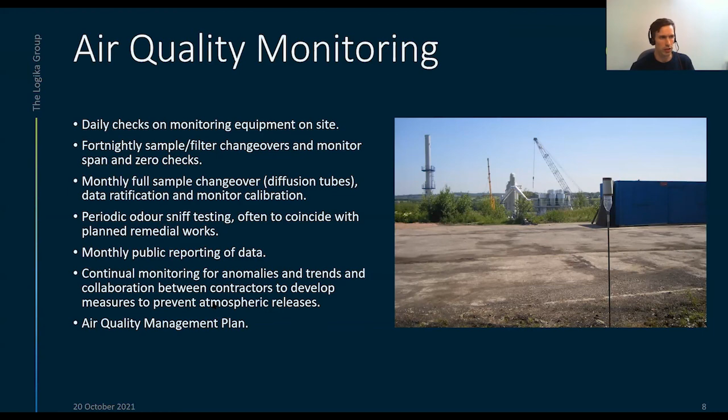The teams have been engaging from day one back in 1999 with the local community to ensure that, particularly from the air quality side, people understood what was going on, why it was happening, and felt reassured that through the monitoring and things, the kind of Corby Steelworks case study wasn't going to reoccur.

There were regular community updates and events, Q&A sessions, things like that went on that people could come along to. This kept the community engaged and responded to their queries and suggestions.